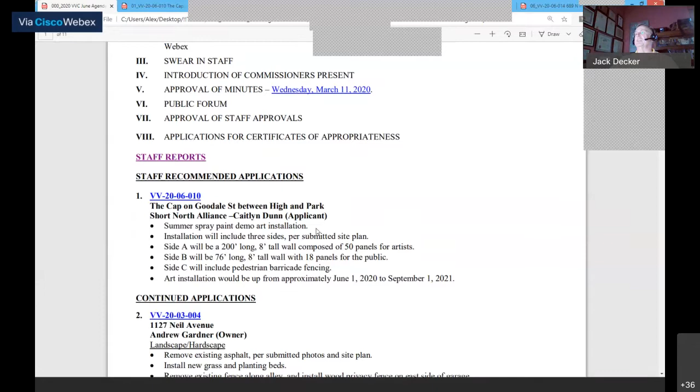All right, applications, shall we go through our applications? What's first? Jack, do you want me to read off the number and the address, or would you rather do that? You can do it, there's no reason to do that.

Agenda item number 1 is VV-20-06-010. This is the cap on Goodale Street between High and Park Streets. The application is for a summer spray paint demo art installation. The installation will include, as originally proposed, 3 sides per the submitted site plan. The idea is to have side A be about 200 feet long with an 8-foot high wall composed of 50 panels for the artist. Side B will be 76 feet long, the same tall, with 18 panels for the public. And side C will include a pedestrian barricade fencing. The art installation, as originally proposed, will be up from June 1st, 2020 to September 1st, 2021.

I did receive an email from the applicant that there's a little bit of modification due to COVID, they're altering what they're doing as well as they're altering the time frame. But when I pass this over to Caitlin Dunn, I will let her explain a little bit more.

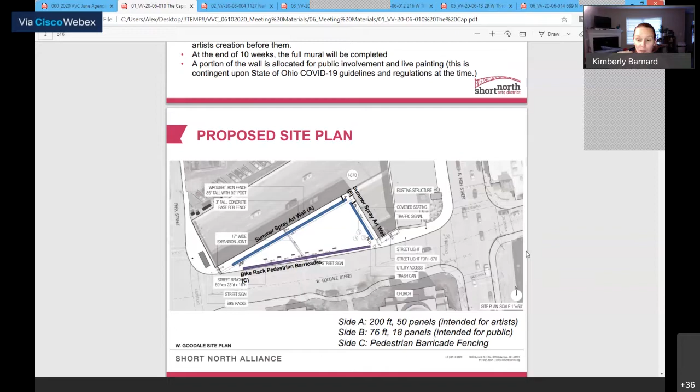I do want to mention real quick, the items for discussion include the Short North design guidelines, the design principles that well-placed public art should be encouraged as a means to build on the district's focus as a center for creativity. Placement of public art in public spaces such as parkland, plazas, and sidewalk cafes is encouraged. Public art should be designed and installed as to not damage or visibly obscure contributing buildings or building elements. HPO staff feels that the placement, scale, and design of the proposed project is appropriate and in line with the Victorian Village Commission and the Short North Design Guidelines. We recommend approval, and I will hand this back to you, Chair, to swear in Caitlin Dunn.

Caitlin Dunn, where are you? There you are. Caitlin, do you swear or affirm the testimony you will give tonight is the truth, the whole truth, and nothing but the truth?

You're muted. Oh, there you go. I'm good. You're good now.

Do you swear or affirm the testimony you're about to give tonight will be the truth, the whole truth, and nothing but the truth? Yes.

Thank you. Do you have anything to add to what staff has said? I think Kimberly did a great job with the overview. To echo what she said, there are some slight adjustments. We are not doing a public activation anymore, where originally we were going to have a wall where the public was going to be able to paint as well. But we've been working with the Columbus Public Health Department, and they advised that might not be the greatest thing right now, so it really is just going to be side A, which is the longer wall. We have 10 artists selected, we did a call, and we'll be doing a process on the panels for 10 weeks. We pretty much covered everything in the application, but happy to answer any specific questions.

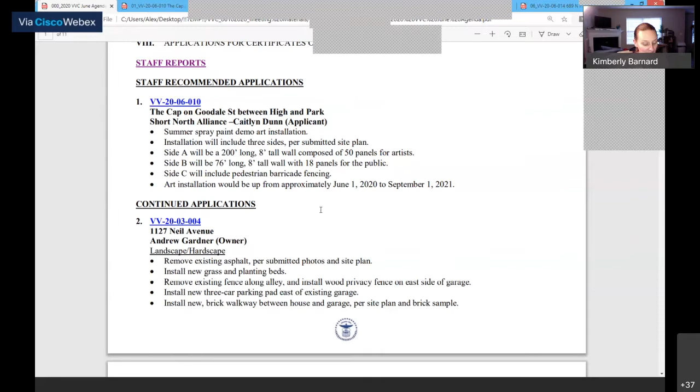VV-20-03-004, 1127 Neil Avenue. This application is for removing asphalt per the submitted photos and site plan, installation of new grass and planting beds, removing the existing fence along the alley, and installing a wood privacy fence on the east side of the garage, installing a new 3-car parking pad east of the existing garage, as well as a brick walkway between the house and garage per the site plan and submitted brick sample. The applicant has provided the materials which the commissioner reviewed.

At the March hearing, the design of the new patio would remove the existing patio from the neighboring property. The proposed landscaping appears appropriate. I do want to note that gravel is not a City of Columbus approved parking surface and should be removed from the design. Staff does recommend approval with the caveat that the parking pavers eliminate the pea gravel between them. And I'm going to turn this back to you, Chair.

I believe we are swearing in Andrew Gardner. Mr. Gardner, are you around? I am. There you are. Mr. Gardner, do you swear or affirm the testimony you will give tonight is the truth, the whole truth, and nothing but the truth? I do. Do you have anything to add to what staff has presented?

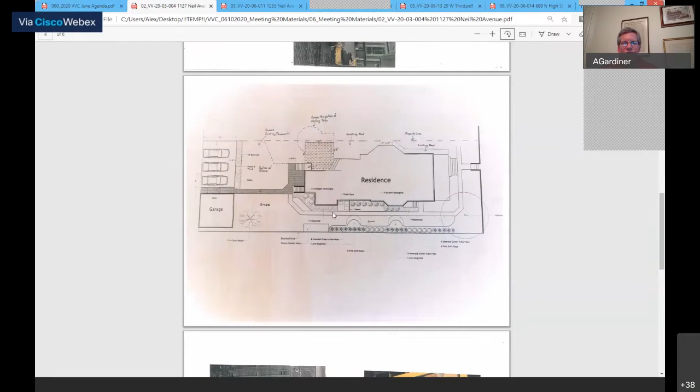This is Kotheimer. Can somebody pull up the spec again? I'm trying to open it and not getting it open. I'll apologize for the ugly picture I found ahead of time. If you scroll down, it should be the very last one, right here. There you go. Okay, so the grass, again, I don't necessarily need the grass there, unless that.

What's the paver material? It's concrete, what I picked out, and I apologize for not having this to you. It's a 12 by 12 inch by 1.5 pewter square concrete step stone. And then the material I've requested is a 1/4 inch gold dust crushed limestone. So the gold dust is actually a nice material, it's what's at Columbus Commons in the gravel area where the chairs and tables are. Aesthetically, I think this is appropriate. What I do worry about is its longevity.

Mr. Chair, it's section 3312.43. I can read it to you, or I'll summarize: that's the required surface for parking. The surface for any parking area, including but not limited to parking, loading, or stacking space, circulation area, aisle, or driveway, shall be designed to control stormwater runoff and be improved with Portland cement, asphaltic concrete, or other approved hard surfaces, other than gravel or loose fill. That's 3312.43.

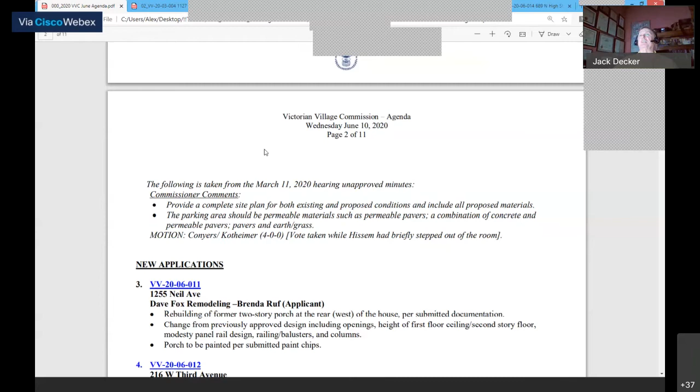Next project, please. Item number 3 is VV-20-06-011, which is 1255 Neil Avenue.

This application is for the rebuilding of a former 2-story porch at the rear west elevation of a house per the submitted documentation. There is a change from the previously approved design, including openings, height of the first floor ceiling, second story. The modesty panel rail design is changed, as well as railing balusters and columns. The porch is to be painted per the submitted paint chips.

Items for discussion include: proposed elevations do not match previously approved COA number VV-19-09-009. Details of window and doors do not appear to match existing, and the floor height seems a little too high on the new drawing. Staff does recommend approval with the condition that the new plans be revised to match existing details and more closely match details from the previous drawing to recreate the former porch.

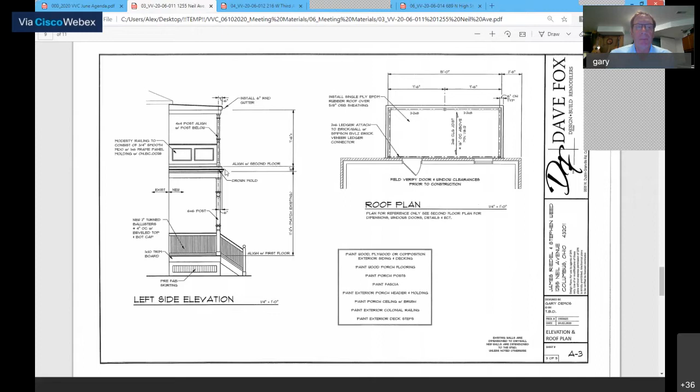Please. Okay, really our intent was to match as close as possible the previous drawings, with the only substantial change being not using the built-in box gutter detail. I'm really a little confused, I guess, on floor heights, because our intent is to match what was there before. We obviously have to tie into the heights of the existing home. So that catches me a little off guard in terms of the floor heights being different.

If you look at drawing A4, it sure looks different. Okay, considering a step down from the original door opening on the original certificate, original application - is that what you're referring to? I don't know, I'm just saying there's a lot more space between the top of the door and transom on your new drawings than there was on the old ones.

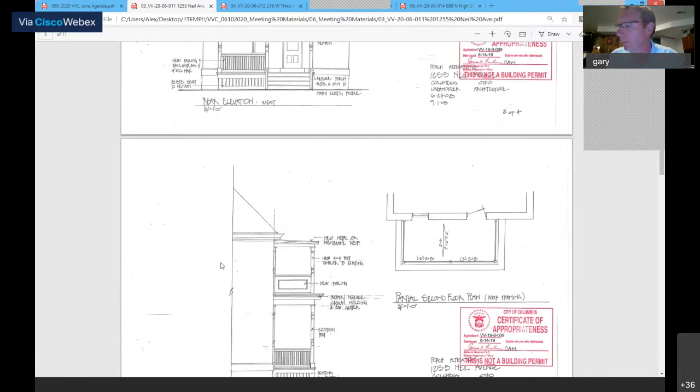Well, it's really a matter of just matching the floor heights. We have no control over that unless we had a stepping down from the existing floor surface, which I don't think we want to do. And is that the current condition? Yes. All right, currently there is no porch there.

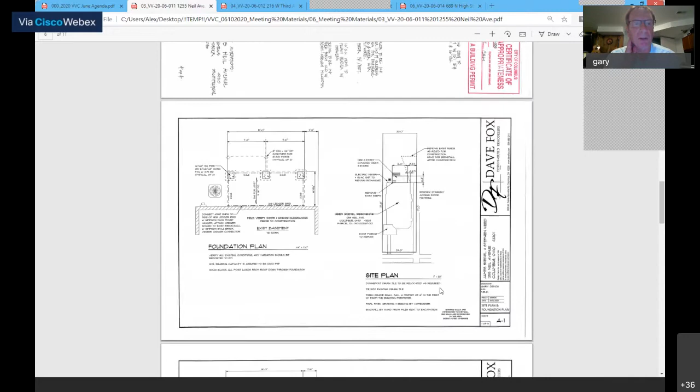It's been removed for safety issues. Or was that the condition? It was the condition - well, it may have been on the first floor, but not the second, I don't believe. I think the second floor was where there was no step down, and there may have been on the first floor, but I don't know because I didn't see it before it was torn down.

The drawing's off a lot, actually. But really, essentially, we're just tying in - you can see on the back where the old floor system tied in on the second floor, which we're going to tie in the exact same spot.

Does anyone see any other problems with this?

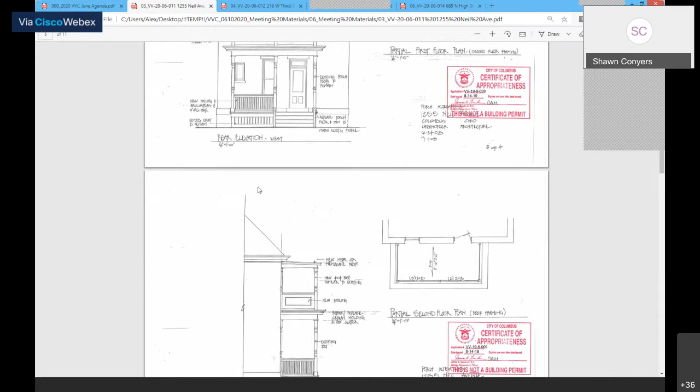This is Conyers. I think it's compounded a little bit because if you look at the drawing on the screen, the previous COA, and you look at the elevation, there is a step down. There's kind of a limestone sill there, and you would step down to the porch. The number of treads shown in the previous scheme versus the number of risers and treads shown now, and that porch elevation is lower.

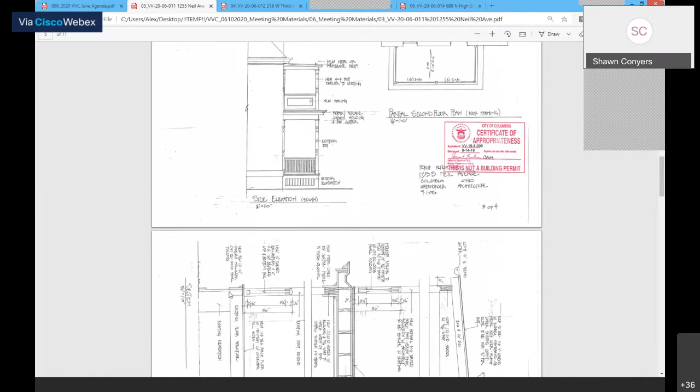So if you look at this elevation, you step down, and what's represented is a limestone sill being expressed. Then if you go to the elevation shown now in the proposed, it seems like the elevation of the porch is right at the threshold or sill condition of the true door opening itself. I think that makes the elevation appear squatty, and at the same time there's probably some lintels and things of that nature not shown in this drawing to grow that door height accordingly. So I think it's compounded, but I think the sill condition is incorrect in terms of where the porch is placed.

You think the porch ought to be down below the sill, below the door? That is correct. Absolutely, yes. Traditionally you would step down onto the porch and let that lintel or that limestone sill express itself. That's correct, that is what I was thinking.

And I guess I have another question, because the new drawings show a 6-panel transom, which strikes me as odd. Is that intentional?

Applicant? We don't intend to change out the transom at all. I think that's just a representation of a transom.

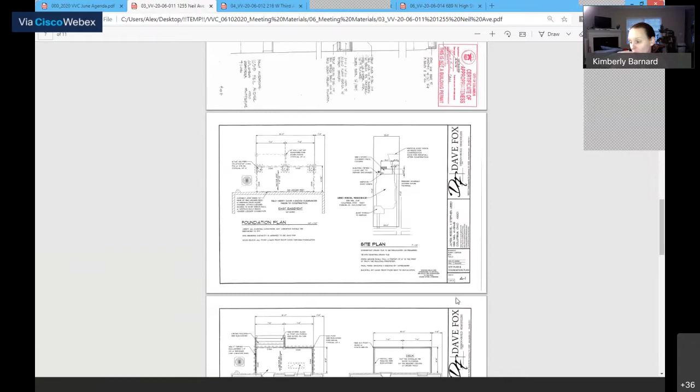Door on which floor? First floor door? Yep, that one. Good door, we're not changing the doors. We're not changing doors, no.

And if you look on the original COA, we're not changing any openings. I think that's just a screen in the photo. Got it, I was looking at the drawing.

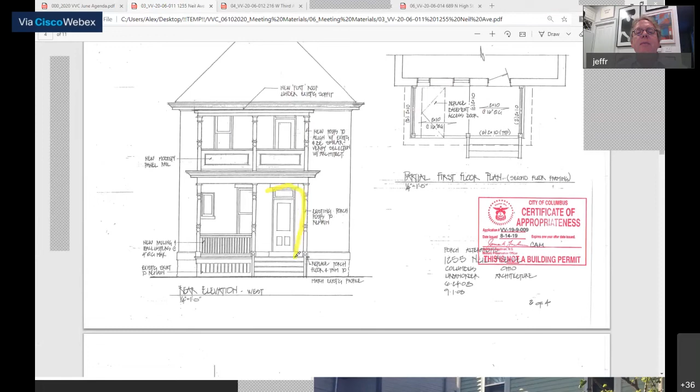So I guess the first application was correct in how it detailed the actual building. This new application, I keep hearing it's a representation, but without having those corrected, we end up leaving ourselves open to interpretation, I think. We need a new set of drawings.

I think so. Can I have a clarification? Is that a new set of drawings with the step down and the accurate door representation, and transom, even though we're not changing the second floor level? Okay. I think that's it. Have I left anything out, commissioners?

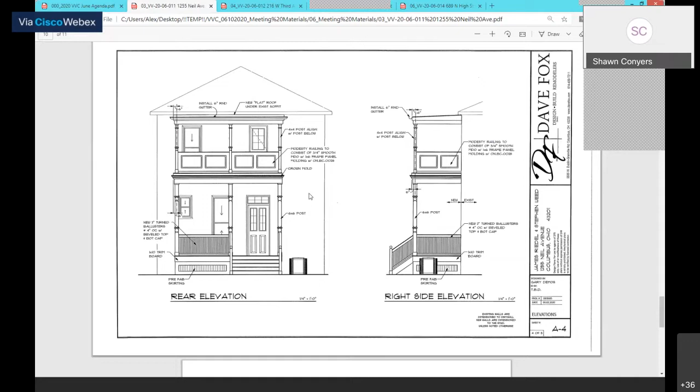This is Conyers. I just have a couple more questions quickly, and I won't labor over them. I think the gentleman mentioned earlier about the water management as far as removing the box gutter. I picked up on that in terms of evaluation, but I wanted to understand, given this porch and this condition of cover, what is the water management condition? How are you going to treat and protect the detailing, et cetera, applied at that band board?

Okay, so we're going to have the gutter on the upper roof level, and we're not going to put any gutter on the intermediate level, just crown molding, and then the new roofing will go out and extend over the crown molding.

Okay, all right. Just long-term durability, I guess, and things of that nature in terms of replacement - it probably is going to impact that over time, which is understood though. Yeah, but there will... I think Jamie, go ahead. I'm sorry, go ahead sir. Yeah, there will be a rubber roof membrane underneath the decking on the second level, on the intermediate level. So that'll be a good rubber membrane roof protecting that.

Does that drain by evaporation or does it go somewhere? Well, it's going to have a slight tilt on it, and it'll only catch rain from wind, because the upper roof level will catch all of the runoff from the upper roof. So then it'll just run off. It'd just be like an open porch, basically.

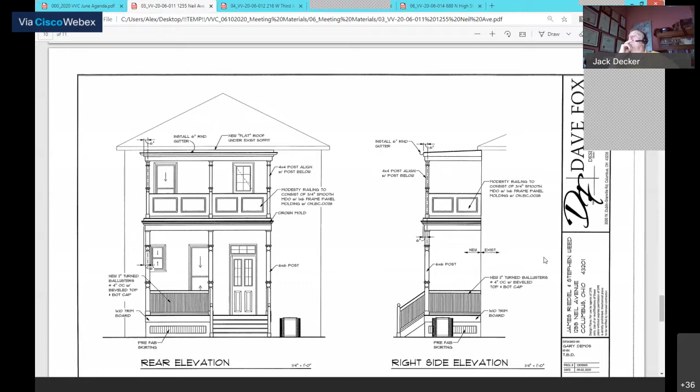So, okay, might a greater overhang for the upper roof help? Or do you think that's enough?

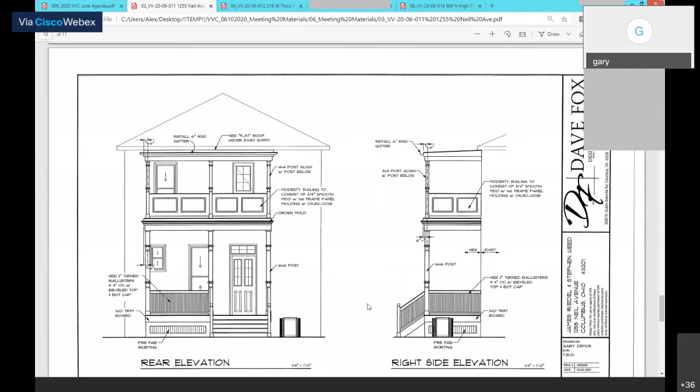No, I just wanted to point it out from a durability, long-term standpoint. But I think as the gentleman said, he's going to correct the detailing and try to pick up some of those details that are lost. I think it has to do with the relationship of the front fascia or band board to the decking itself, getting the proper extensions and transitions that will help some of the conditions he's expressing. Yes, that's correct, on these drawings. Yes sir. Okay, do we have consensus about this?

So, how do we want to handle the new drawings? Staff approval? Staff approval, okay with us? Yep. I'm okay with it. Can we have a motion?

Anybody remember what all the problems are now? Yeah, I'll try. Okay, good. Sean, do I'll try. I'm sorry, Conyers. Yes, sir. Yes, Conyers, a motion to approve as submitted with the following changes.

That the porch elevation would mimic the existing conditions, meaning step down from the sill condition, or I should say the threshold of the rear door -- not the existing condition, but the previously approved set of drawings. Because the porch is gone. That is correct. Everything is got in reference to the previously approved set of drawings. Thank you, sir.

All right, continue. That the detailing at the porches and those terminations of the band board and fascia and decking will be picked back up from what was shown on the previously approved set of drawings, and that the new drawings will correct the proportions of the existing to better align with the previously approved set of drawings. And those revised details and drawings will be reviewed by staff.

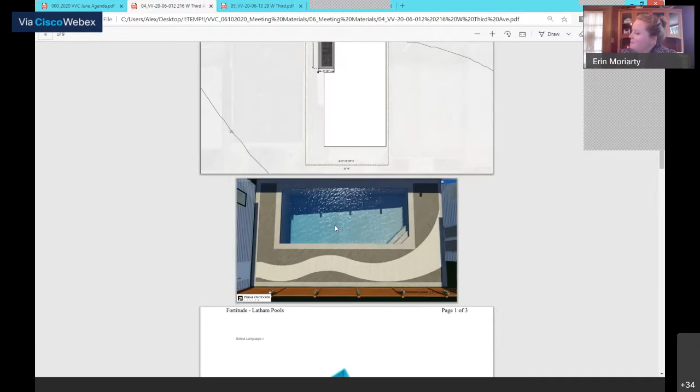Discussion, any questions? I have a question. This is Moriarty. I'm wondering about the distance on the right side of the drawing, which I assume is the east side.

The distance between the edge of the pool and the fence line, it looks like the measurement is the distance from the edge of the pool to the property line, but is that going to leave proper access on that side of the pool?

It is. I'm not sure exactly why, because this was before I purchased the home, but there are actually two fences. So there's a fence, and the property line is actually beyond the fence. When we were talking to the city about what we needed to do, we have to be a certain distance from the property line. There will be, as you can see, a tile, I think it's 3 feet on the side of the fence that will allow for any maintenance to the pool to be done from any portion of the pool. It's only 14 feet across.

It's bigger than my pool. That's a joke, I don't have a pool. Funny. Thanks, guys.

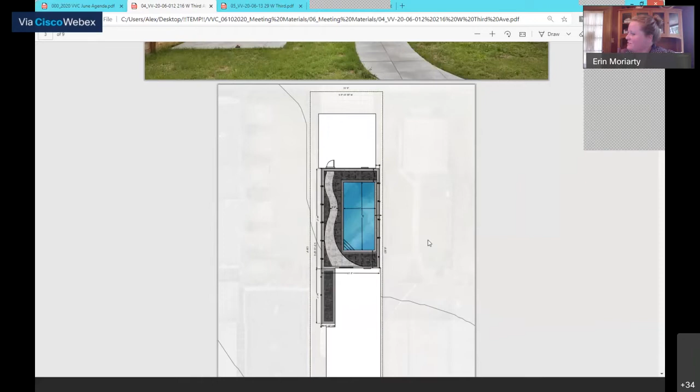I was more concerned, maintenance yes, but also if there's an emergency, if someone could be rescued from that side of the pool. They can be. Okay.

Further discussion? Have we a motion? Make a motion for 20-06-012, and that's 216 West 3rd Avenue as presented. 216 West 3rd. Do I have a second? Second. That's Liesel? Moriarty. Moriarty, very well.

Any further discussion? All in favor, let's start with Mr. Hissam. Aye. Ms. Moriarty. Aye. Who's next? Ms. Kodheimer. Aye. Mr. Conyers. Aye. Mr. Decker, aye. Motion passes. Thank you, sir. Thank you very much.

What's next? All right, moving on to number 5, VV-20-06-013. This is 29 West 3rd Avenue. The application is for the removal of an existing one-story frame addition, construction of a new single-story frame addition with an elevator in the rear.

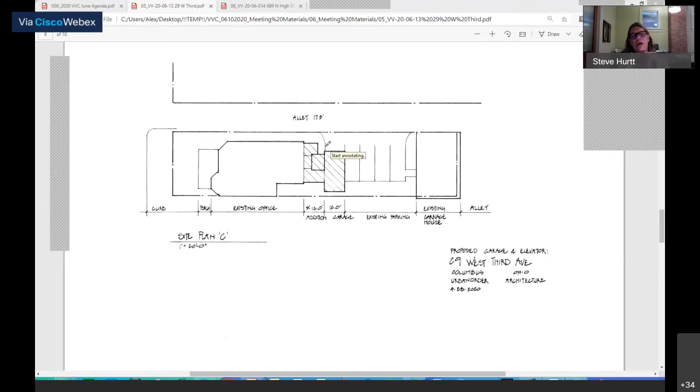And then if you look at the site plan, you can see how the garage element is forward of the elevator connector, and then it's further back. So we have created that as a separate structure, and we put that little roof on there to make it appear as if it is a separate piece.

The other concern that I think was brought up in the March meeting was that we are eliminating parking, and this is a commercial office, and then there's a residential carriage house in the back.

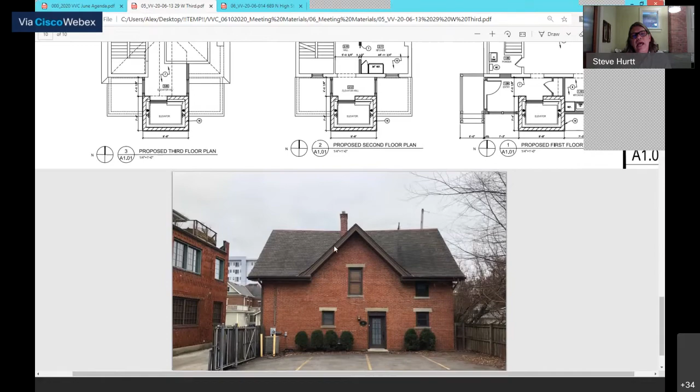So what we tried to do was keep the same parking, or keep as much parking as we could on site, by having everything accessed from the alley. I think we've got a unique situation with this side alley, and then this carriage house in the back. We can't have interior parking or a garage because the carriage house already exists back there and it's all residential. We have this side alley to access what we are trying to make read as a detached single car garage.

And then the porch columns are just aluminum round, the worst kind of replacement columns you could get. So we're planning on putting in a Turncraft with the correct proportions, and all the other porch details stay the same.

Could you explain again why you can't have a second detached garage back there, other than the fact that it would occupy more parking spaces? I think that's the reason, is it would occupy more parking spaces. And when we presented that separate detached garage, I don't think people were excited about it. I know we talked about connecting it, and as Kimberly said, staff doesn't support that. But we're trying to weigh in parking and making it appear as detached as we could.

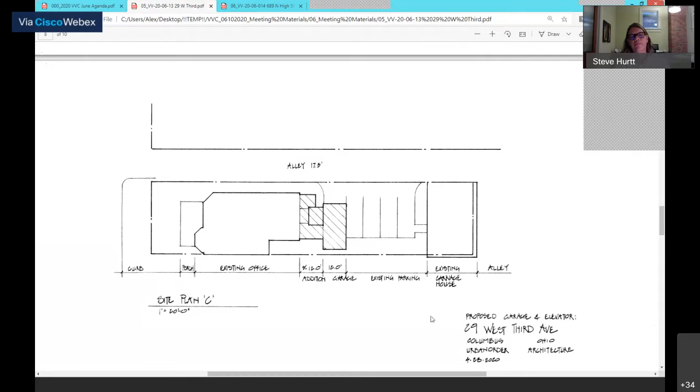Anything else on behalf of the applicant right now? Discussion.

I think they have done a remarkable job with this. Are you doing the metal siding on the elevator shaft? I would prefer to do the metal panels on the elevator shaft, because I think the composition you have does not pull away from the house, nor does it add to the house. It's quite nice. And I think if that shaft was metal paneling, it becomes more sculptural, versus when I see it with the brick and siding, it almost looks like a huge chimney of some type. With the metal, it reads as it should read. And quite frankly, the garage, I'm fine with how that reads also, considering what the lot is. I think this is almost everything we had asked for, but that's my opinion. I think it's great.

Anyone else? This is Liesel. I would echo Jeffrey's comment on the elevator. I'm actually remoting in from Savannah, Georgia right now, and within a block's radius there are very similar elevator additions on some of the historic inns, essentially houses turned into businesses. They typically are sculptural. I mean, you know what it is, an elevator. They might be glass on one side, a very refined material that's separate from the building because it's an addition. So I think that's appropriate. I am still having trouble with the tiny garage though. The elevator and the rest of the addition looks super handsome, but the garage just seems bizarre to me.

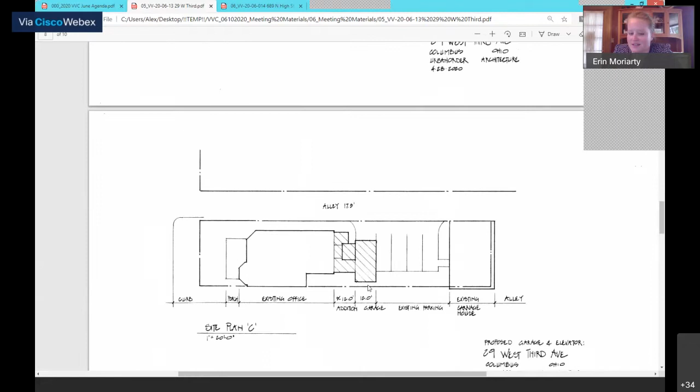Anyone else? This is Moriarty. I agree. I like this material usage better than the previous application. I am kind of wondering about the garage, it does look very small. I guess wondering to make sure that those are the correct dimensions shown here for a 2020 sized car. It's a 12-foot wide garage with a 9-foot door. So it is... you're not putting a monster car in there. Okay.

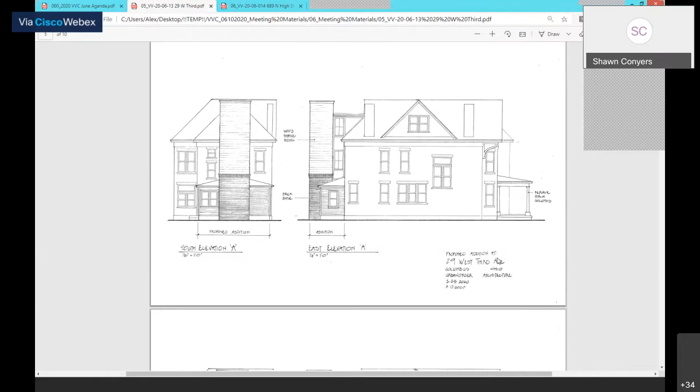Anyone else? Yes, sir, this is Shawn. I would agree, I think option F is great. I would just think about the color selection of the metal panel, and whether it's dark or light, in terms of its composition, so it appears sculptural but at the same time blends somewhat with the existing color scheme of the building itself. As far as the garage, I think we as a collective group were a little nervous about having 3 objects potentially occupy that site. But in this case, it's kind of snug or hugged up against it in a comfortable manner, so it appears somewhat separate as a detached structure, but you still get a sense of ownership dedicated to this home, while the separate carriage house towards the rear of the property is its own thing. So I think there's less competition amongst the elements. I'm okay with this option put forth in front of us this time.

Shawn, did you say you wanted that wrapped in copper? Yes, completely. I just wanted to make sure. Yes, sir. Okay, yes, sir. And I would amend my statement, wrapped in copper.

You'll have to check with your client, I guess. I get a comment here. I'm with Liesel.

We go with attached garages, but only when we can't find another option. Here it's a choice between a detached garage with some storage that sacrifices an additional external parking space, versus a car and maybe a couple rakes, and I don't think you're getting much function out of the garage, and it kind of looks all jumbled up. If it were separated even slightly from the chimney, and in a material that matched the addition, it would not look like just a big clutter of buildings.

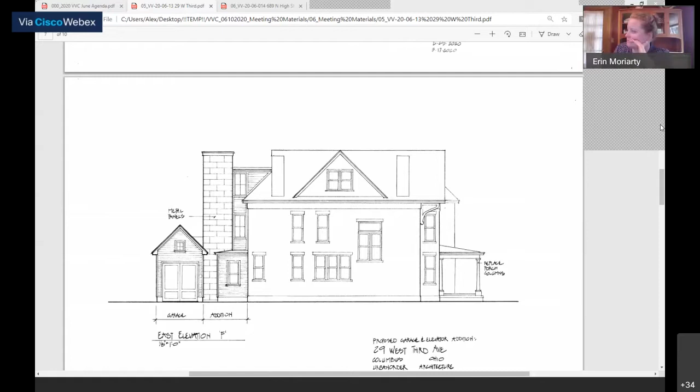Your carriage house way in the back would be separate enough from these two buildings that they would go together, whether the garage is attached or not. So I'm with staff, and to the extent Liesel wants the garage separate, I understand, but I think about as good a job as can be done has been done with the rest of the design.

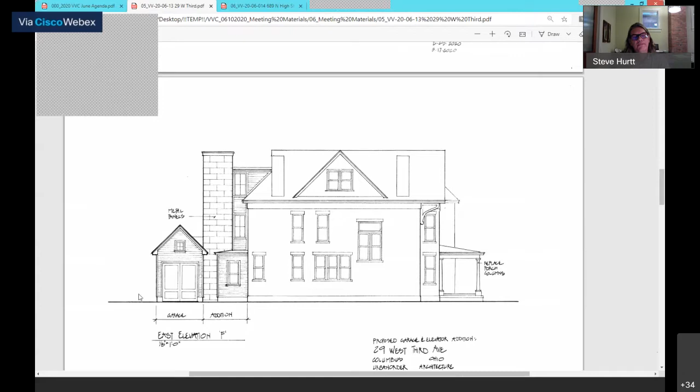If it helps you in any way, the garage is deep, so we do have storage. And we purposely changed the roof peak or the roof slope of the garage — the roof slope is low, the garage is steep — and tried to make that a distinct element by having it protrude closer to the alley.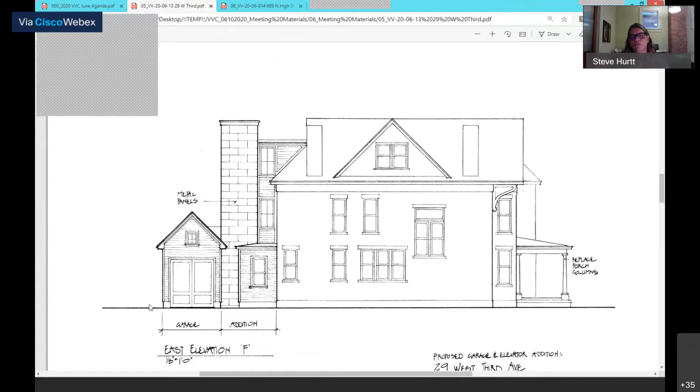I also think that if we do a darker metal on that elevator shaft, that visually provides the space away from the house that I think you're talking about. Because if we do the elevator and then three feet of space and then the garage, that starts getting busier. But if it's all wrapped together with that darkness behind it, I think that recedes, and different parts of the building will pop at different times.

Agree with that. Maybe we ought to have two motions, an A and a B — one for everything but the garage and the other for the garage. And I think we still have an open issue with exactly what the cladding will be on the elevator. Is that right? And we can submit all of that.

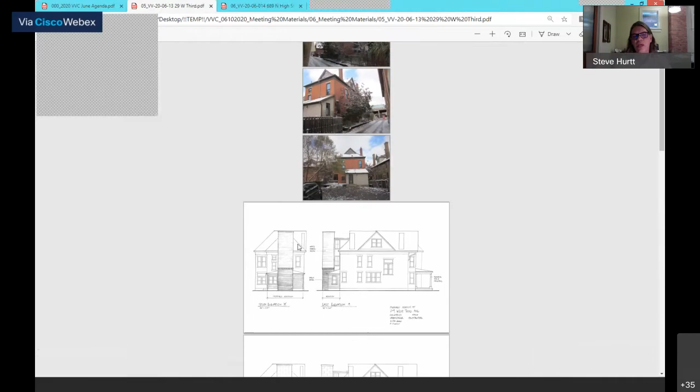I have one more question first, Jack. There's a fence existing right now with an electric gate — what is the condition going to be with that, is that just being removed? That is going to be removed. We are working with a landscape architect who will be presenting plans based on how this goes. Since we're changing the parking in there, we're anticipating that whole fence and gate goes away, so it's open to the alley. Okay, thank you. The property lines are also a little fuzzy between all of these buildings.

Not a bad idea. So let's keep going, you guys. Okay, let's have A for everything but the garage.

Somebody want to move to approve as submitted with the material to be sent to staff for a subcommittee for the elevator shaft? I move to approve everything except for the garage as submitted, with the cladding material for the elevator to be submitted to staff for approval. To whom? Just for staff? Yes. All right, do we have a second?

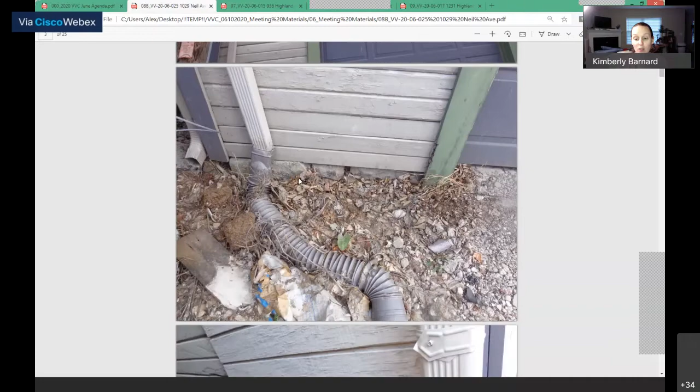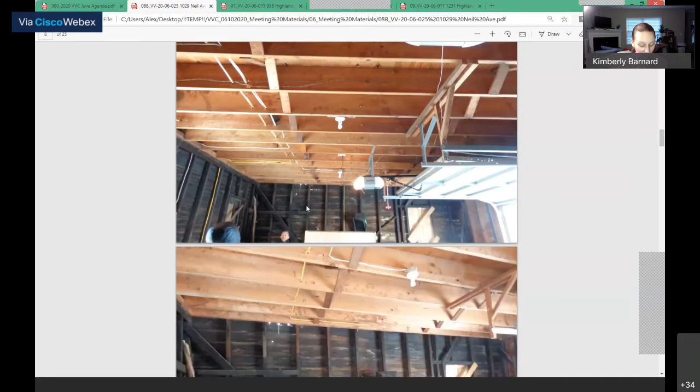The circa 1900 building is a significant contributing structure. While there is some deterioration that exists and some inappropriate repairs have been made, the building does not appear to be beyond repair. The commissioners can also only take cost into account when we're dealing with the appeal of a denied application. Staff recommends approval with condition. Staff does support repair and renovation rather than demolition of this carriage house. But if demolition is approved at this hearing or a future hearing, staff does recommend an abbreviated HABS report is completed to include photo documentation, measure drawing prior to demolition.

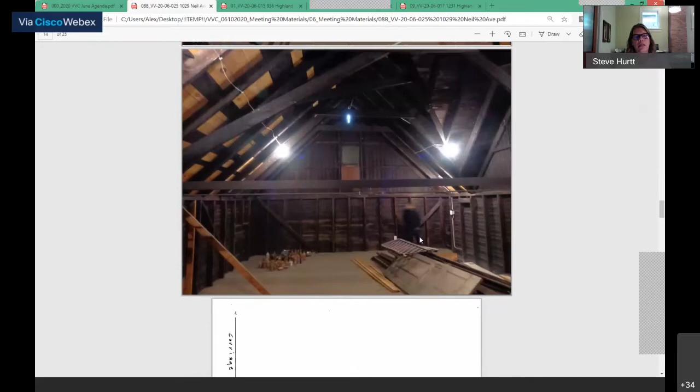So Shawn, would you agree that we're really talking about preserving a patched-up structural shell? That is correct, by the time we're done. In order for it to be properly done, I think that's where—

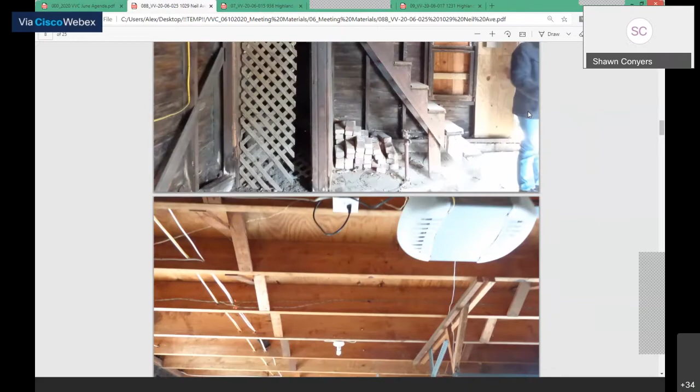I don't think the commission would want a secondary or tertiary repair completed, because we've seen 2 to 3 repairs already in terms of the fire damage that's gone, and it looks like there were some roof structural elements that were slightly changed or altered, which we couldn't really pinpoint when reviewing it. So for it to properly be done—which I'm hopeful with this team—it's going to be more of a severe renovation in order to mitigate all of the concerns that were evaluated.

By secondary or tertiary repairs, do you mean half-baked? That is correct. It's just more of a surface treatment versus repairing it correctly so it stands for another 100 years.

Discussion further, anybody else have a viewpoint on this? Well, I visited Shawn and staff. This is Coatheimer. I mean, in my opinion, a 25% premium for preserving a historic structure doesn't seem totally out of line to me. At the current moment, the structure is successfully serving its purpose as a garage. The owner parks their vehicles in it, and it's not falling apart, and their vehicles seem to be safe in there.

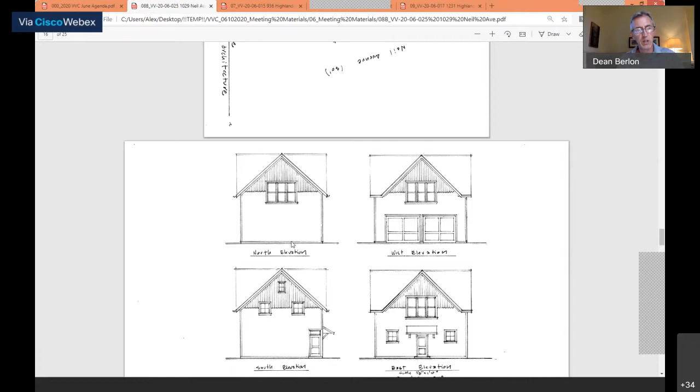I understood that, but what would it be composed of? Wood, HardiePlank? A Hardie or Boral or some other, maybe even a tongue and groove product similar to what's there now. If the commission thinks it's appropriate, we'd like to be similar to that structure, so the contributing mass and size, fenestration would still be there once we rebuild it.

Yeah, thanks for highlighting. Any other discussion?

Are we seeking approval of both the plans for the replacement project and the demolition? Yes, when the commission looks at a demolition, they want to know what's going in place. Right now it's conceptual, so we'd be happy to bring a more fully fleshed out version back, because I know you're limited on time.

What do you want to do, vote on the demolition today? Is there any other material we can use to guide us? I think the applicant has been in front of us several times trying to figure out which way to go, and we need to get him an answer one of these days.

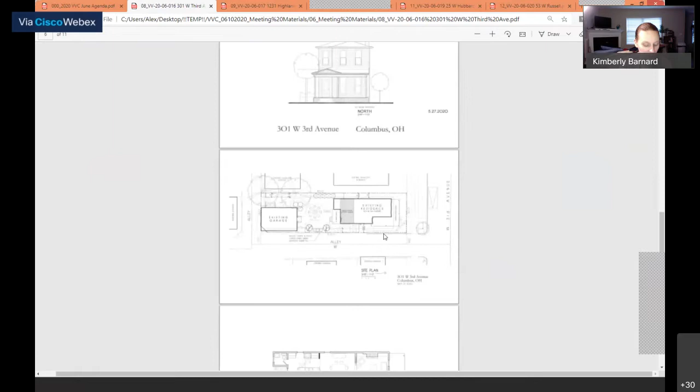Windows would be Pella Impervia single hung. Additions should be lower than the original roof height and narrower than the historic structure. Historic materials should be repaired rather than replaced. Chimneys are considered contributing features to residential structures. And the Pella Impervia windows are typically only approved as a casement window replacement. A different window from the approved windows list should be utilized.

I did list the applicable standards, which include that the distinguishing characteristics of the property should not be destroyed, and deteriorated architectural features should be repaired, and whenever possible, a new addition or alteration shall be accomplished so that its future removal will not impair the essential form, function, and integrity of the structure. Staff does recommend approval, as I noted with the windows, and that the chimney is kept and maintained.

I believe we should have Tom Shepaka and then the homeowner. Chair, I will hand it back over to you to get them sworn in. All right, where are you folks? Speak up so you'll light up.

Tom Shepaka on phone. Okay, anyone else? We need to have them on video for sworn testimony, that went out in the meeting materials. Theoretically, the things that allow me to swear in applicants require that it be on video. So the homeowner, I believe, is on video. Who is? Johnson Lau, I believe. Where are you, buddy? Wave or do something so you show up. Not on video.

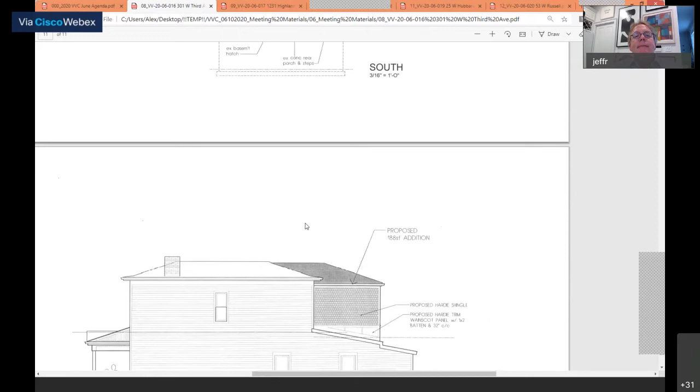Thank you, sir. Commissioners, open up for comment. This is much different than all the meetings we went through, so I'm going to listen to other comments first. Okay, Liesl or Erin?

Erin did note in the chat that she's having a significant delay with her audio visual. There are actually a whole bunch of these little caution signs going up on all the speakers showing that there's low bandwidth and the connections are poor.

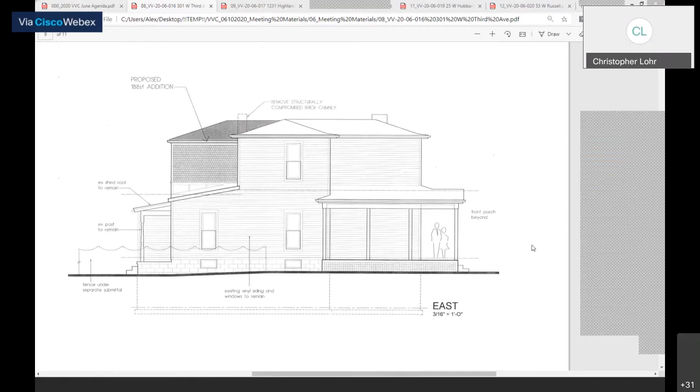Nothing sticks out to me enormously on this other than the removal of the chimney. It bothers me quite a bit when interior features affect the exterior of the house, and I think that's something that needs to be amended on this. I'm also not quite understanding the wainscoting as part of the design.

May I clarify? Go ahead, Mr. Lau, you can clarify. We can keep any feature that exists and pick from the approved window list. The chimney, my understanding, is it's an interior element and will not be seen. I'm trying to understand the concern, I want to make sure we address it. We're not trying to make this deviate from the original style.

Mr. Conyers, I'm just going to interject that we need to get through the commissioners before we go back to the owner, it becomes more crosstalk. Thank you. Understood, Jamie, thank you sir.

Erin, do you have any comments? No, I'm okay. Jeffrey, do you have any comments to add? I'm okay if everyone else is.

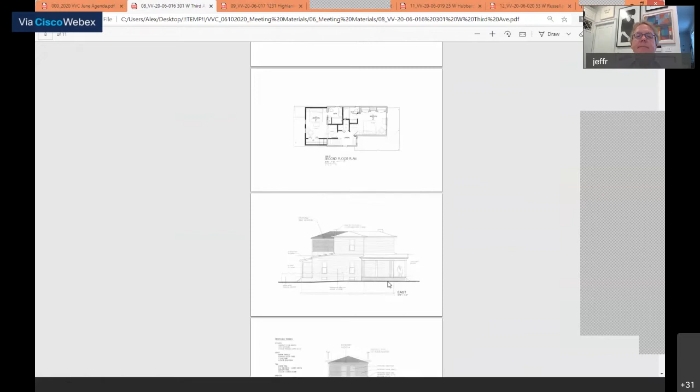I would agree. What do you think if it was board and batten, Liesl? I just think it should be one material. And also the small window where I'm assuming the kitchen counter is not appropriate.

So I'm going to offer a couple comments too. One is I think the first floor addition has two components. One is the addition is kind of in the same plane as the existing home, and I'm just trying to understand new materials versus existing materials and how that works out in terms of that transition.

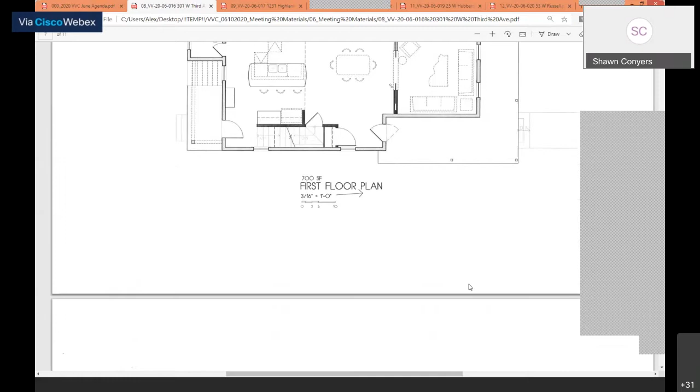When we work ourselves back to the rear porch, the foundation actually continues, and you can see that more in the east elevation sheet, versus it stopping at the first floor, with the porch itself reading as a separate element. If you extend to the south elevation, the next sheet, you'll see that condition of the porch basically pulling itself past to find some efficiencies marrying up to the existing footprint. But it doesn't seem appropriate in terms of massing, and articulating the porch related to the column, etc.

So those are just some high level observations. I would agree with the commissioners.

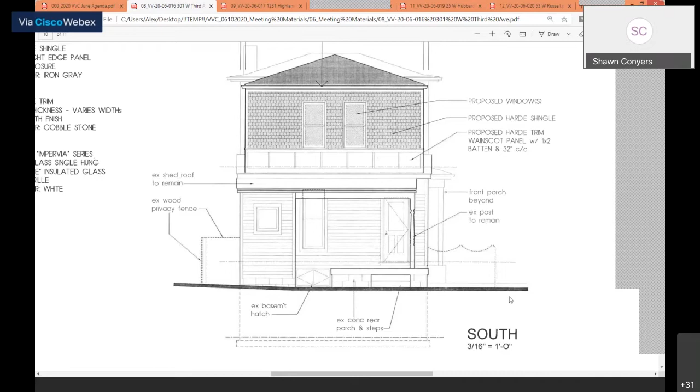So Mr. Lau, would you want a motion to continue to take consideration of some of these comments and come back before us again? Or would you want us to? No, actually, we—

Go horizontal or batten, just give us the guidance and we'll do it. We would like to vote and hopefully get this smaller. We're trying to do a smaller scale addition than last time, so we're hoping this is actually even more preferable for the neighborhood than we had attempted before.

Really like to. What about the chimney?

So you basically would like to have the chimney still on the roof. About the inside—I mean, we're not going to see the inside, right? I'll have to talk to the office. So if you do it, just leave the—

Point of order. You need to agree to something or continue it, but you need to say yes, we will maintain the chimney, and that's how we go forward. To clarify—all right, yes, let's maintain the chimney. Yes.

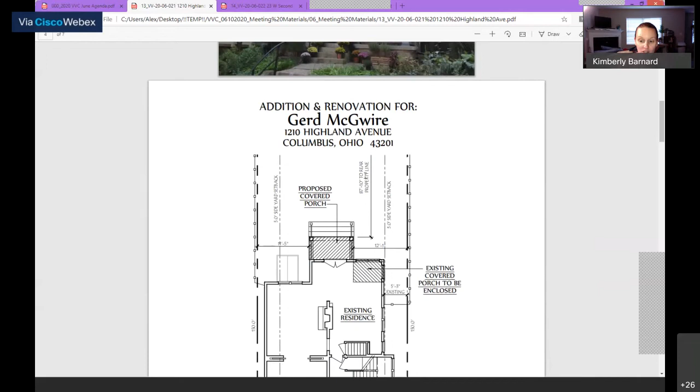The enclosure of the existing porch and new addition as proposed would affect architectural characteristics typical of structures in the district. City Code 3116.11 standards for alteration to keep in mind.

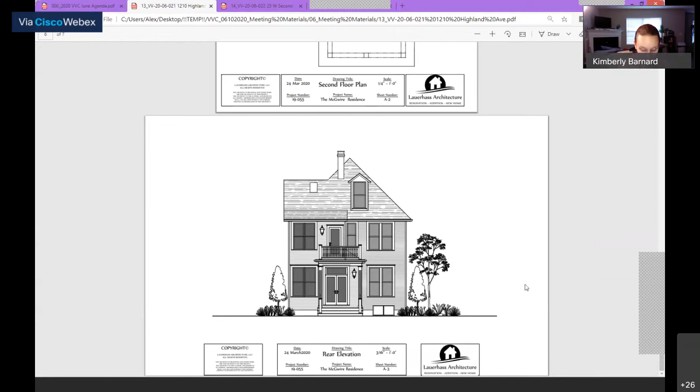The distinguishing characteristics of the property should not be destroyed. The removal or alteration of any historic materials or distinctive architectural features shall be avoided whenever possible. Distinctive stylistic features and examples of craftsmanship that characterize a property shall be treated with sensitivity. Whenever possible, a new addition or alteration shall be accomplished so that its future removal will not impair the essential form and integrity of the structure.

In passing upon appropriateness, the Commission shall consider, in addition to other pertinent factors, the architectural characteristics typical of a structure in the district or listed property, the historical or architectural value and significance, architectural style, general design, arrangement, texture, material, and color of the architectural feature involved and its relation to the architectural features of other contributing properties in the immediate neighborhood.

Is Amy Lauerhass or Gerd McGwire here? Where is her image so I can swear you in? When we started the meeting I was able to show my video, and now all of a sudden I can't display it, I don't know what changed. There's a stop my video button at the bottom of your screen, second from the left if you mouse over it. Make sure that isn't on. It says we cannot display your video - make sure your camera is shared in your browser.

Well, this is a conceptual, so I don't know if we need your sworn testimony. I would actually like it to be the final, if that's okay. Is this the conceptual on the agenda? This is listed as a conceptual on the agenda. I believe this is the first time we're seeing this as well. Yes, that's correct. I don't think we can do it as a final without video and sworn testimony, but I think we can ask questions and get feedback now. Do you agree, Jamie, that's the way to go? I do, sir, I do. That's the keeper of the video rules. I think I just got video. Hold on one second, I'm still going to say we should be talking about this conceptually.

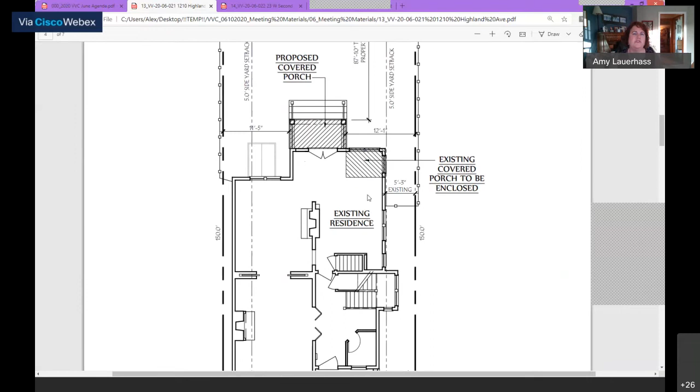There you can see on the site plan where the void is now that will be enclosed, and then the entry porch behind that.

Is there an elevation drawing? Yes, there is a drawing. The elevation drawing is, I think, at the end of my packet. Lisa, it's all in there. Yep, you need to. The link doesn't work. I don't have a link to this packet, so.

There we go. All right. Since nobody else is commenting right now, I will point out that the addition we're altering is not all that well done. So I don't have a problem with the general idea. The one thing I would point out is it's usually not a good idea to replicate the exact details on a front porch on the rear, because usually there's a proportionality where the grand stuff and the weighty stuff is on the front, and then what is on the rear is lighter and simpler. I think you could do the same thing, but with less ornate posts and a less ornate set of details.

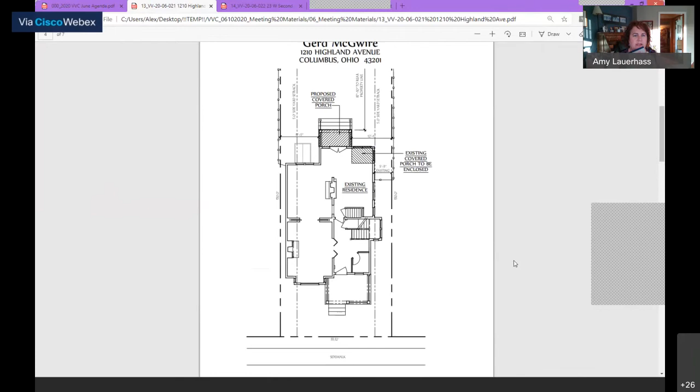You don't necessarily need turned posts on your upper fence. We'd be more than happy to do just a straight baluster. The posts out front are fluted, and we'd be happy to do a flat post and a flat, simple square baluster to simplify the back porch as compared to the front one.

Shawn and Aaron, what do you think?

This is Kotheimer. I'll add that I agree I don't have a problem with the overall idea of doing this addition, but I think it's going to need a couple rounds, definitely one round of massaging. There's certain things like the window in the upper left that does not line up with the windows on the house. There's just a general sense of spacing that doesn't look proportional, the doors look a bit funny, and the posts for the railing. So it needs another round of going back and taking cues from the house, checking things against the original house.

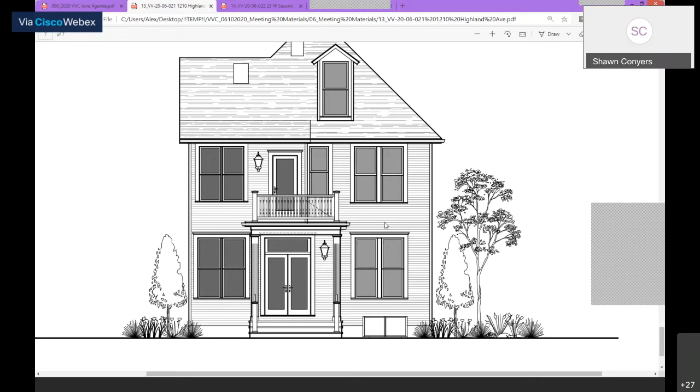I guess the issue is whether the lower level doors aren't centered in the porch, or because the new windows are all centered over each other, which the current ones actually are. Yeah, so the upper left windows look like they might be shorter than the ones on the far right. No, they're equal. Yeah, the sill of the new windows on the left second floor equals the sill of the existing windows on the right.

Okay, well if that's true, then that's true. It doesn't look to be that way. I think the door on the upper portion and the window seem kind of crowded, and just visually it's generally unappealing. The posts on the porch, I think those are railing posts - I can't really tell, but I think those would be better as metal railings than wooden railings.

For the lower part? Yeah. Okay, you're not talking about the railing around the porch, you're talking about the steps, right? The handrail or whatever it is. Yeah. Okay, steps. Yeah, and we're fine with that as well.

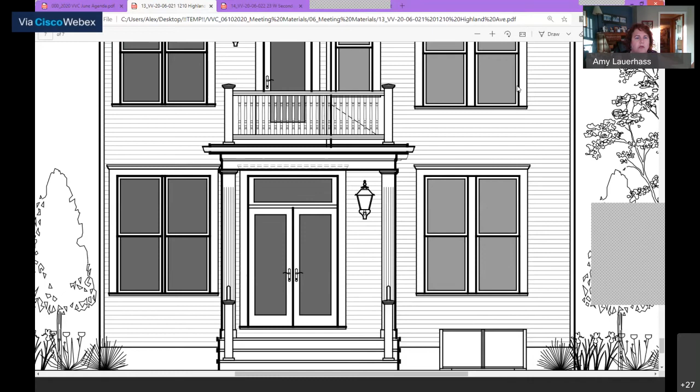All right, do we have any other commissioners still with us? Yes sir, I'm still here. This is Conyers. I would echo the comments provided by my fellow commissioners, in terms of being able to simplify it. I would agree with Lisa in terms of revising the handrails, looking at maybe a concrete stoop, and just being able to simplify it. But I would agree that this is kind of a better composition than what was completed before, but it's worthy of another round of review.

Aaron? You're on mute. Aaron, we can't hear you. Sorry, that was my fault. I think generally we would ask for a dimension drawing, so that might be something you would also include.

Bingo, we think if they are taking good notes, they can come back for approval with a set of complete drawings next time. Okay. All right, thank you.

We have 6 minutes left according to my clock. What can we do?

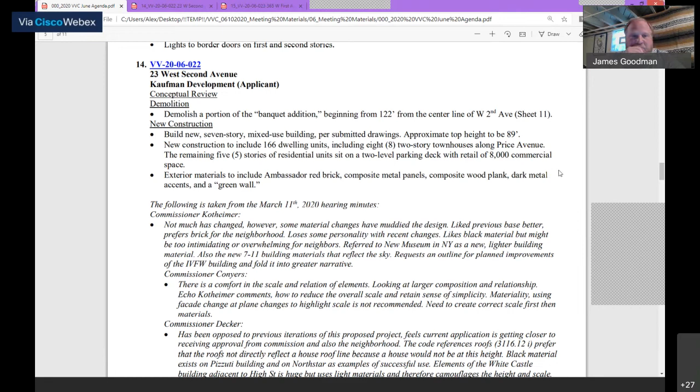Mr. Chair, I think we should at least hear the beginning or offer some preliminary feedback on the Kaufman development. We've had a lot of stuff on this, and it's been a long night, but I'd hate to have this continued yet again. Is that the last thing on the agenda? There's two more after that. Yeah, let's go to that, see what we can do.

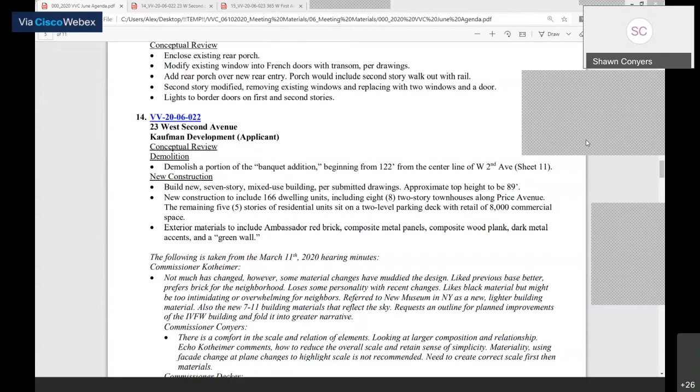Who's here for Kaufman? Mr. Chair, before we get into the last application, I would just like to say that if applications 15 and 16 are not being heard, I think we should make sure we let them know that. I'm ready to stay here all night, but I think staff is not, and we're going to have to continue those, right?

We had a 2-hour limit. We're at 2.5 hours now. That's correct. So I would say that I'm going to be continuing 15 and 16. Do we have a motion to do so? A motion to continue 15 and 16. Second. Further discussion? All in favor? Aye.

Let the record reflect we are sorry that we are not going to get to you tonight, but we will have you scheduled, and if we can offer any feedback in the interim, we will do so. I'm very sorry too, this is a new system and we're moving as fast as we can with it.

All right. Who's here for Kaufman? Mr. Suter. Real good, Brian Suter. We have Dan Ayres. Yes, sir. We have Frank Sasso. Who else is here? Devin Carruthers, are you here with us? I'm here. Anybody else? Oh, Brett Kaufman, you're up there in the corner. All right, everybody raise your hands. Brett Kaufman, Brian, oh, Jessica.

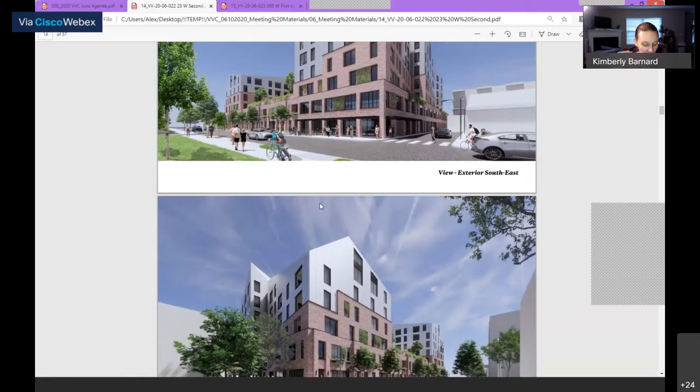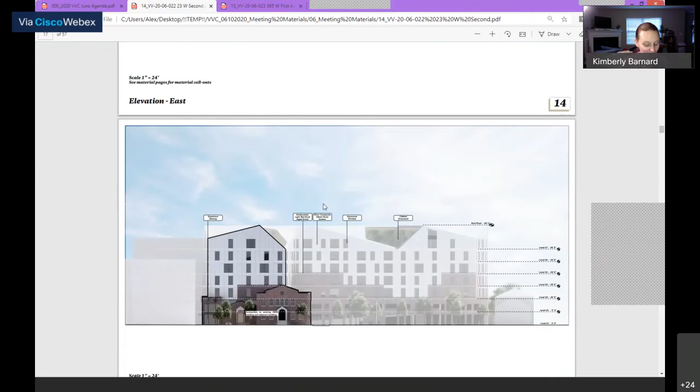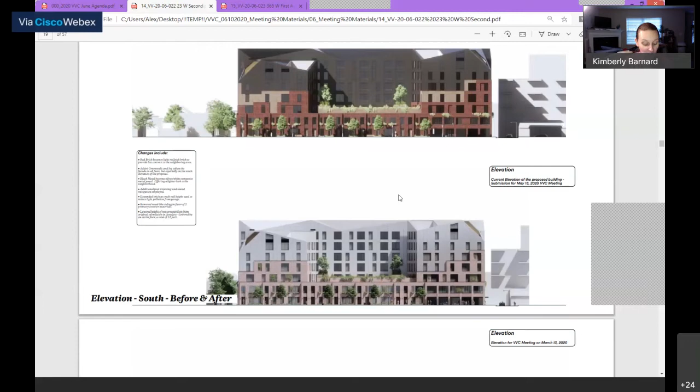A little bit of city code to keep in mind: 3116.12, standards for new construction, new structures reflecting contemporary designs while using contemporary elements to relate to existing contributing properties in the area. Also 3116.11, standards for alteration: contemporary design for alteration to a property shall not be discouraged when the alteration does not destroy any significant historical, architectural, or cultural material, and its design is compatible with the size, scale, color, material, and character of the property, its environment, and surrounding contributing properties. Chair, back to you.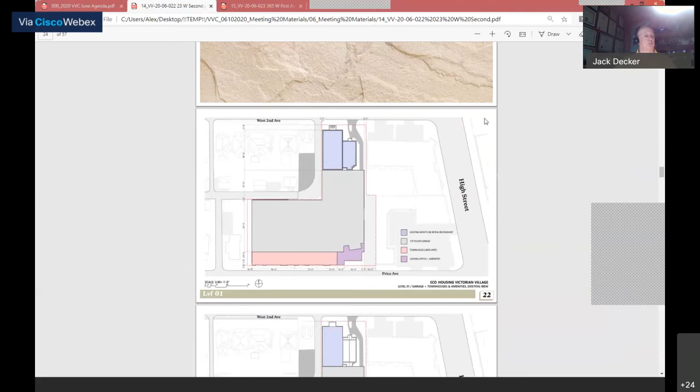Very good. There are other items in the code that are relevant, like 3116.12I: generally a simple roof shape is preferred, and where brick dominates in nearby structures, new construction shall be brick. Section D: the proportion of openings, width and height of windows, doors, and entries shall be compatible with adjacent contributing properties. And 12A: new construction structures should use contemporary design elements that relate to existing contributing property surrounding the new structure. Height, mass, width, and proportion affect the degree of compatibility there too.

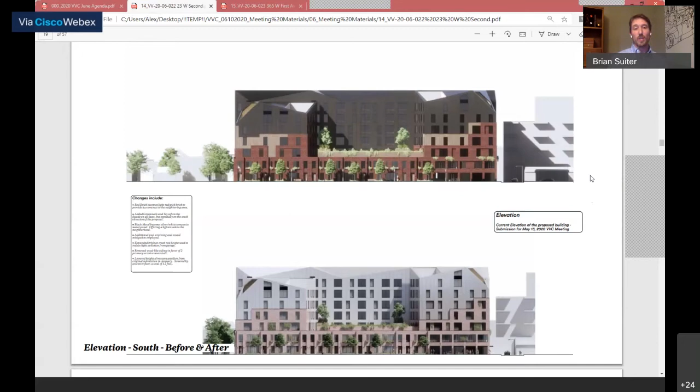Just to set the context, obviously we're in a vastly different place in terms of the socioeconomic and economic standards of the world right now than when we saw you guys last, three months ago. So that has come into consideration as we're working on the building in terms of our underwriting and our expectations of what the world will look like once the building is finished. Just take that into consideration.

Furthermore, I want to point out that over the last week the Short North Arts District has become much more of an arts district, with a significant amount of art being put up on barricades and throughout the neighborhood, as well as other applications adding more murals to the overall context. We continue to believe that architecture is art in a form, and would like to continue to push for buildings that aren't necessarily exactly like all the others, having some unique contextual value to the architecture.

Beyond that, just to emphasize, we have worked to reduce the mass of the building on the western portion as it gets into the neighborhood. For reference, other projects similar in scale and size in the neighborhood: the Hubbard Park project is 52 feet, Pizzuti is at 53 feet at its lowest point, Yoga on High is 65, and the Castle building is 85 feet at its lowest point. Our lowest point is 56 feet, and the lowest level actually goes up to about 67 feet. With our mansard roofs, the peak of the lowest roof is at 77 feet. So that's some context on where the other projects are within the neighborhood.

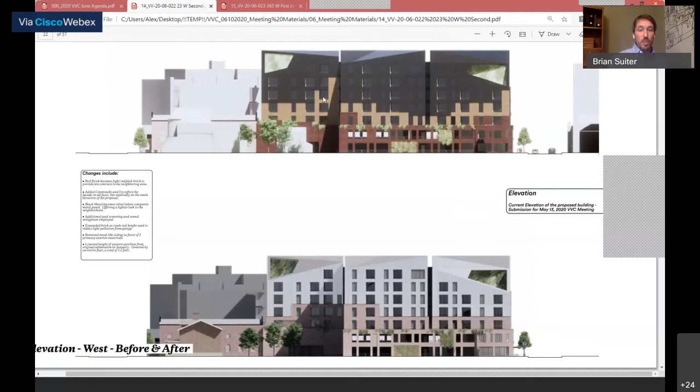There were a couple comments previously about what we're going to do with the IBEW building, and I want to touch on those so people understand we've started to consider the expectations for the restoration of that building. We anticipate repainting trim, window repair, putting in new windows as needed, restoring the building exterior to its previous condition, tuck pointing, and repairing roofs and any water damage that has occurred over the last couple of years. We have focused on that, but we will happily dig into it at much more length if the commission would like to see that.

We know there have been challenges in the past with the commission approving certain building materials, and then those materials may or may not actually end up on the building. So we'd like to say we're perfectly willing and happy to come back as things change or shift around, to provide updates on materiality and how things have shifted.

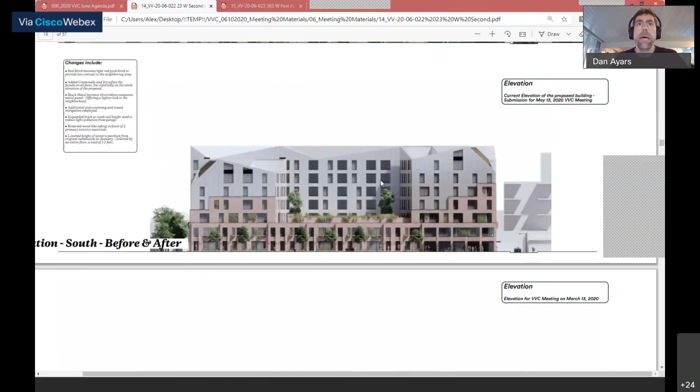Looking at making sure that our overall scale, the greenery is also in places that we showed in a rendering with a little more detail of how that greenery is working on the upper levels. It brought the overall lightness of the building, which is really having an impact on the overall massing of the project. Here you can see the south side as we step down towards the neighborhood, as Brian mentioned, getting those heights down to a more reasonable scale, which we believe matches a number of the other projects built in the neighborhood.

I'm going to keep it fairly short. You guys can see a lot of the changes that have come from this. We've provided a couple of options, so to Brian's point, when we come back for approval, some input today on one of the two directions would be great. I don't know, Frank, if you have anything else you want to add to the discussion.

No, I appreciate everyone sticking around and giving us feedback. I think it's been said well. For the past 3.5 years, every submittal we've really tried to emphasize coming forward with something we think is architecturally significant, that adds to the art and architecture of the neighborhood. It's gotten exceedingly more challenging in the current environment, but we think all the more important to stick with this. We're at an inflection point where we're really trying to hold true to something we think adds to and contributes to the neighborhood, and we're hoping to get some good, clear feedback tonight so we can move this forward.

I'll add one more thing quickly, this was a comment previously, with respect to some of the greenery we're showing on the building. We've obviously reduced that down significantly. A lot of the spaces where you see greenery are now within common spaces or spaces the landlord controls, so we have the ability to maintain and keep that up rather than having rental tenants be obligated to do that. So we've taken that into consideration. Again, the concept is an eco-type building, so we do want to maintain some of that greenery, but we've reduced it down pretty significantly to listen to some of the comments that have come in over the last couple months.

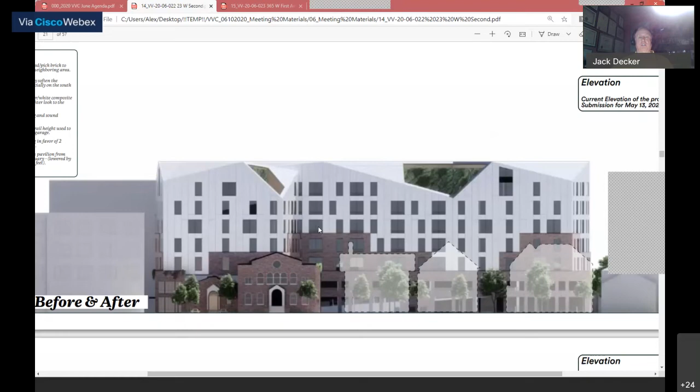Next, I might as well go. Let's back up to the top of the building. I read off a bunch of criteria under the code about what is and isn't appropriate, and I think if you consider the top of this building in isolation...

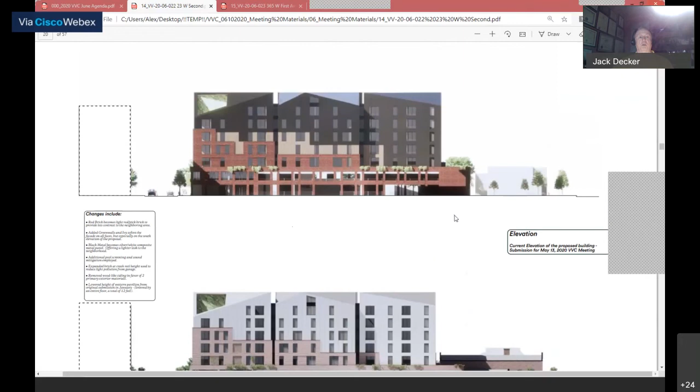it's obviously a big improvement to change to the material you did. I also think it's an improvement to increase the slope of the western part of the building - even though the overall height's about the same, the apparent height is less. But even with those things considered in isolation, there is almost nothing appropriate from a code standpoint about this.

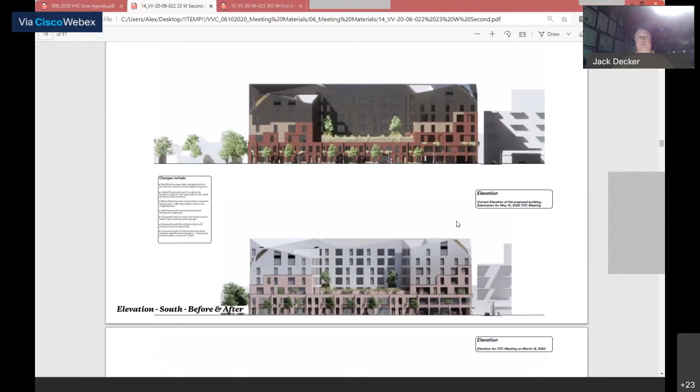Now, we don't approve parts of buildings, we approve entire buildings. So the majority of your building is this tall thing, and I'm looking for a way to try to reach consensus on this. The only way I can find to do that is to say, okay fine, we can have a very artsy top of the building, but something, somewhere about this building has to be appropriate - and that would be the base and how it relates to the first 2 or 3 stories, and how that relates to and intersects with this really artsy thing you've got going on top of it.

As far as the base is concerned, I think you've taken steps back rather than forward. I think the two materials you presented as alternatives are less appropriate than the red brick we had before. Certainly both the dimensions and the two-tone kind of thing - the pink brick is something we don't see anywhere else in the neighborhood, even though some parts of this building are supposed to echo materials used in historic buildings. Even worse is the white brick, which is found only on one other building, and that's the White Castle building. I won't reopen old wounds by debating whether that was a horrible mistake or just a small one.

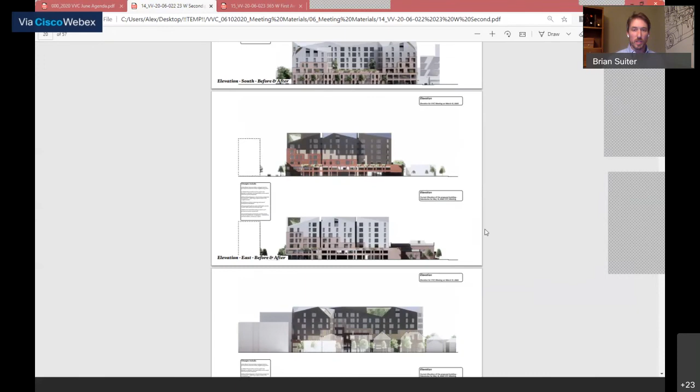I could just butt in here really quickly - Alex, would you mind just going to page number, I think it's 13 in this. I think right now we're looking at an appendix that doesn't necessarily show the concept that we're really looking at. Thank you, that's good, just to have people be able to look at that as we talk through it. Thank you, yep, that's perfect. Good.

One thing you can do: you've still got brick above the second floor on the towers, and it looks like a pasted-on material. I realize there's some relief between that and the aluminum, but not much. If you could pull that out so it looks like an upward extension of your first and second floors, so the brick reads as a brick sub-building rather than a brick applique on an aluminum building, that would be much better.

I've monopolized the floor long enough, considering we've got 10 minutes left. Another commissioner? Aaron, I don't mind going if you're not ready.

Go, Shawn. Perfect. All right, we're just going to break it down really simple. I would agree with the commissioner's comments thus far.

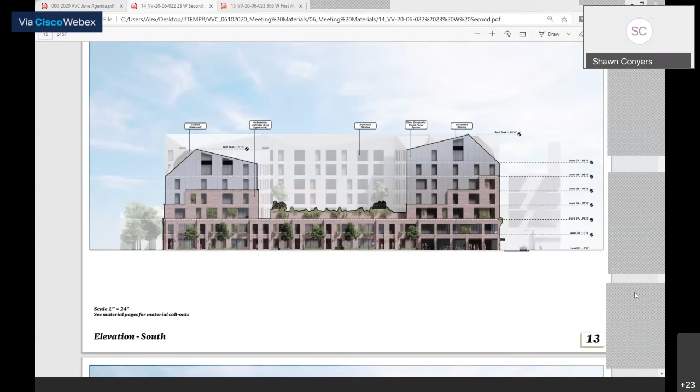And then play up this pedestrian scale, which maybe helps break down the overall mass. I was making an analogy to this transitional site—maybe the Sutton building, which is roughly 6 stories transitioning to 4. I know it was a heck of an effort on that west side elevation to transition towards the west, and there was probably a floor taken off. I know programming-wise it would hurt to get from 6 to 4.

But maybe that can be balanced potentially with however the base is articulated. I'm not saying the floor needs to be taken off—I'm just making a comparison to what I think is an appropriate transition into the neighborhood.

The materials themselves, again, high quality obviously. I think brick as the base condition is totally suitable and appropriate. There's a certain balance in terms of too much articulation on the brick—I know you're trying to stay within a certain language, but it needs to still feel like there's some thought and articulation to it. There's a fine balance, and I'm sure you've got a great team around you that will find that balance. But to Jack's point, he's looking for more attention to the base, which I can completely agree with and embrace.

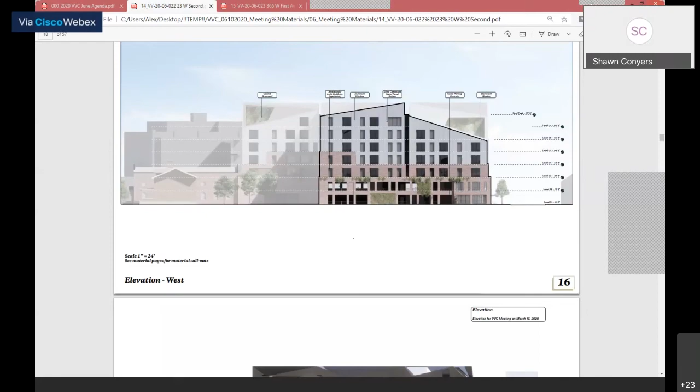I just want to point out—please mute, please mute, sir. Thank you, somebody's making noise. Thank you, I got it.

I just want to point out, I'm not raising issues with the upper part of the building. I'm just pointing out that because it is so far off code, we need to find somewhere else to get appropriate. All right.

Aaron, I have one more comment real quick, if you don't mind. I'm sorry—no, you're fine, go ahead, really quick. No problem, I'm trying to get through them fast, guys.

The garage planning, I think, is very interesting for this particular project. The simplicity of the project is very important, so I'm very interested myself about the mechanicals and trying to understand where these things that create and make a building are going to live, while still being balanced in terms of trying to maintain that sense of simplicity.

I don't know if it's the garage level planning that will give us more confidence, or a little bit more understanding about the infrastructure and how some of those things will work. I think that's beneficial given the scale of the project as we continue to move forward.

Light pollution - I know there was a note about it being addressed, but the floor level elevation still seems transparent. There's no crash wall or something of that nature, based on where the brick is located, that would mitigate those issues. I'm being sensitive to the properties to the north and to the west. That's just high level. The alley to the east I'm not necessarily worried about.